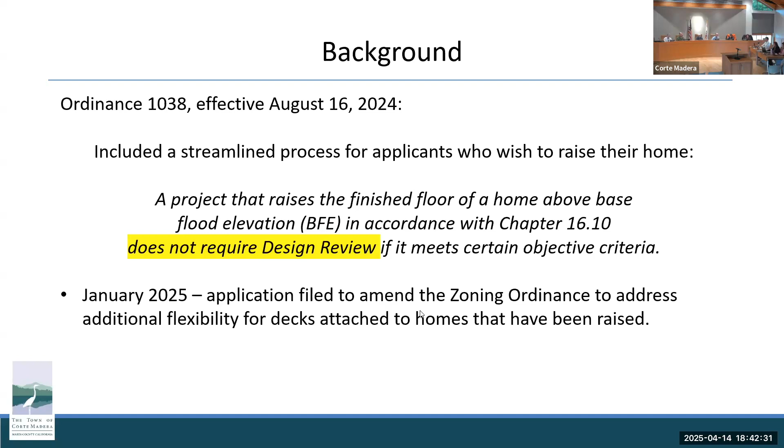In January, the owner of 299 Golden Hind Passage filed an application to amend our zoning ordinance, seeking additional flexibility related to decks that are attached to homes that have been elevated. They intend to raise the finished floor of their home by 2 feet 8 inches, and they'd like to include their deck area as part of the project and raise that to the same level as the finished floor of the home. Our zoning ordinance doesn't allow for that completely. There are 2 development standards inhibiting homeowners' ability to raise larger deck areas when they elevate their house: lot coverage and setback requirements.

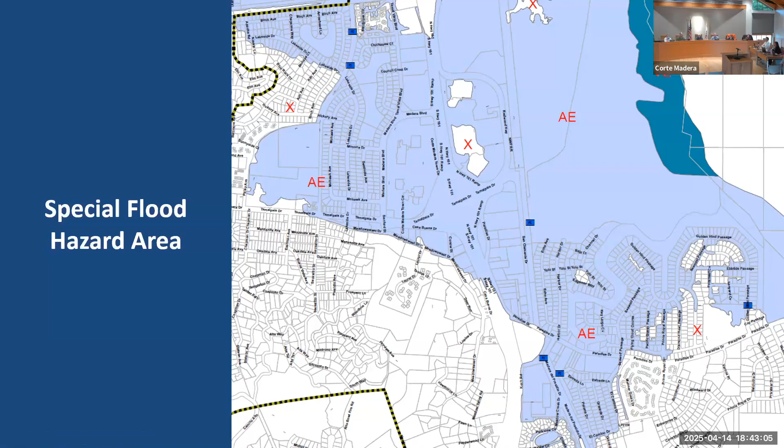Some of the homes that have been raised are in the Mariner Cove neighborhood, and a lot of them are on Golden Hind Passage. There's an attachment to the report I prepared in your packet—attachment 1—that is a list of homes that have been elevated since 2016, and it includes the amount that each home has been raised.

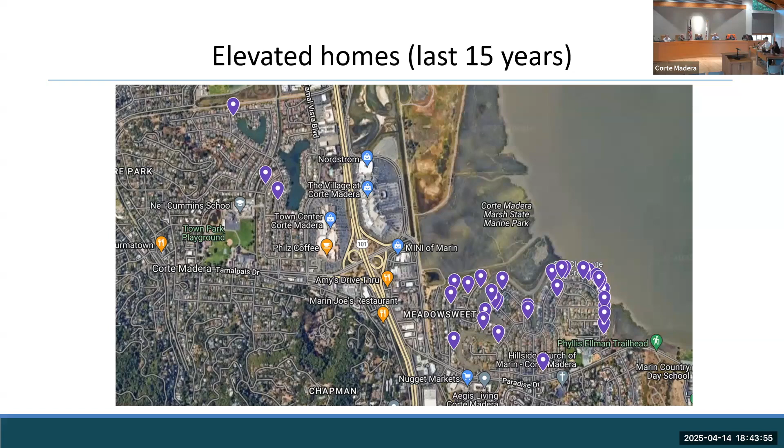As I said, one of the development standards that affects how much deck area, landings, and stairs a home can have when it's elevated is lot coverage. Lot coverage regulates how much of the lot can be covered by structures. The purpose of lot coverage is to control the concentration of structures on a lot and maintain open spaces.

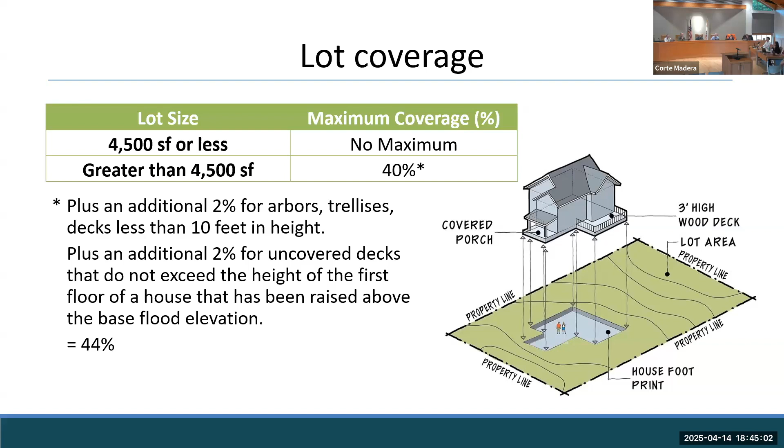In Corte Madera, the properties in the flood zone happen to be in our R1 medium density residential zoning district. The maximum allowed coverage in R1 depends on the size of your lot. There's no maximum for smaller lots that are 4,500 square feet—we don't have very many of those in the flood zone, if any at all. So most coverage requirements for parcels in the flood zone are going to be around 40%, and you can get up to 44% coverage. We add 2% for decks, patios, and trellises, and then an additional 2% when you elevate your home to account for raised landings needed to access the higher finished floor.

This slide is just showing a graphic of what I just talked about. A deck that is more than 3 feet in height counts as coverage towards that 40% or 44% maximum I talked about. A deck, however, that's 3 feet or less in height does not count as coverage.

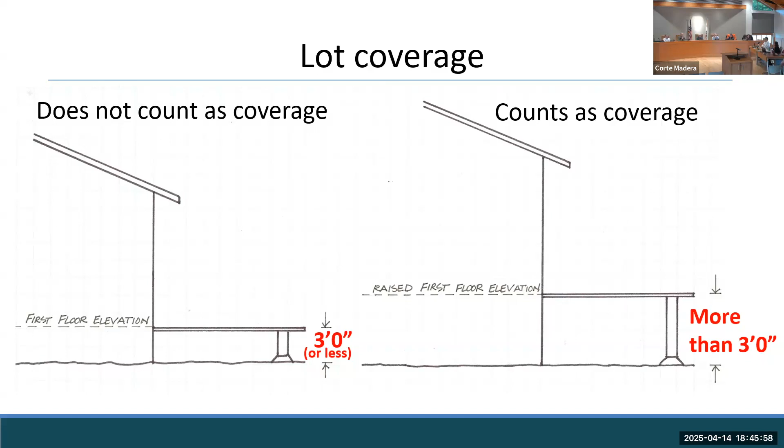Raising a home above base flood elevation oftentimes increases the height of a home by about 2 to 5 feet. That's what we're seeing today. And that's going to impact the stairs, landings, and decks attached to it, the height of those. Oftentimes those new decks and stairs to access the higher finished floor are more than 3 feet in height. So you have new lot coverage when somebody raises their home. And where we are seeing people elevate their homes, they're approaching maximum lot coverage and often exceeding it, needing that extra 2% that's offered.

Oftentimes you see this two-level deck design. Before I describe what's on this slide, in 2009 the town recognized that homes that are elevated are approaching maximum lot coverage and added that extra 2% I'm talking about. An extra 2% for a lot—most lots in the flood zone range from 6,000 to 8,000 square feet in area. So an extra 2% only computes to about 120 to 160 square feet, which is not very much if you take into account existing deck areas and the amount of stairs or size of landings needed just to access the higher finished floor.

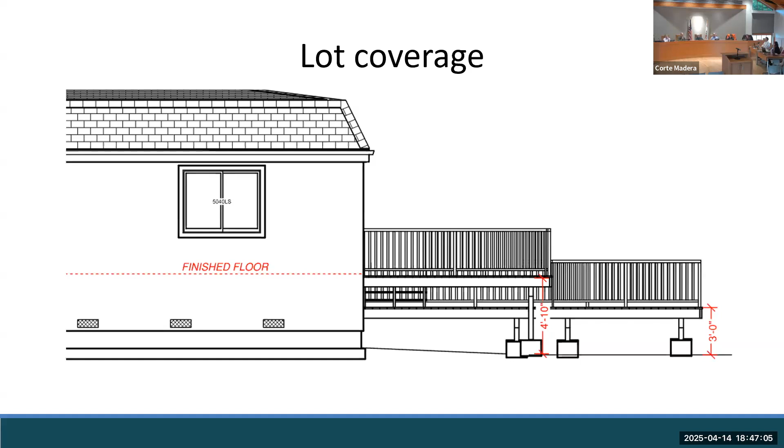As shown on this slide, if lot coverage isn't sufficient, you end up with this two-level deck design where you have a higher deck used to access the raised finished floor of the home, and then there's steps down to a lower deck that's 3 feet in height or less and doesn't count as coverage. That's what this slide is showing, that two-tier design.

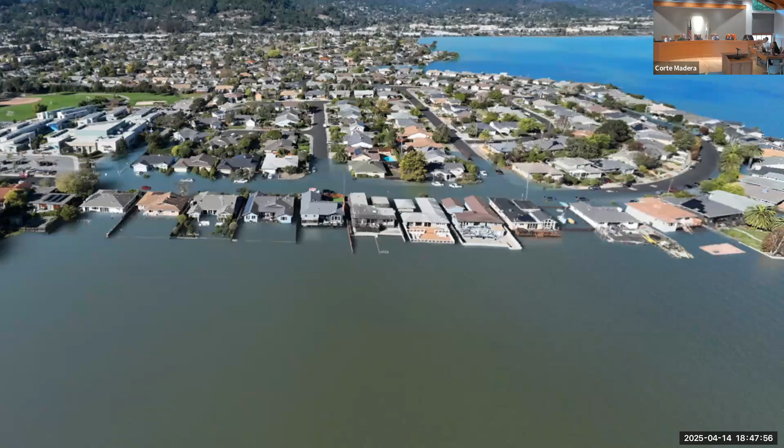It's just another picture of sunny day flooding on the water, and it clearly shows that raised decks and deck areas generally are important to these property owners.

A second development standard that can limit the amount of raised deck area attached to an elevated home is required setbacks. A setback is a required open area and is the minimum distance that a structure needs to be away from a property line. In Corte Madera, the required rear yard setback is 25 feet.

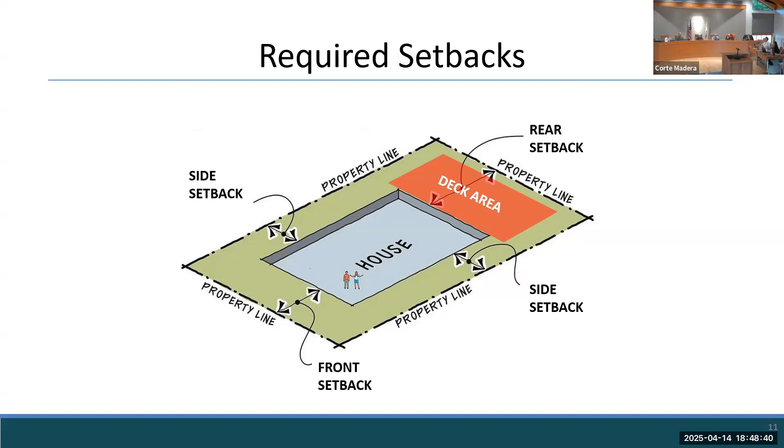Our zoning ordinance allows certain things in a required rear yard setback, and one of those things is decks. There's a red box on this slide showing that a deck that's 3 feet or less in height can be as close as 5 feet to the side and rear property lines. That's what this slide's also showing. On the left-hand side is a graphic representing the permitted location of a deck that's 3 feet or less in height, and that striped area shows where that deck can be located.

A raised deck, meaning a deck that's more than 3 feet in height, can only extend 6 feet into the required front or rear yard. In the rear yard, that means a deck attached—often to an elevated home—needs to have a 19-foot setback from the rear property line.

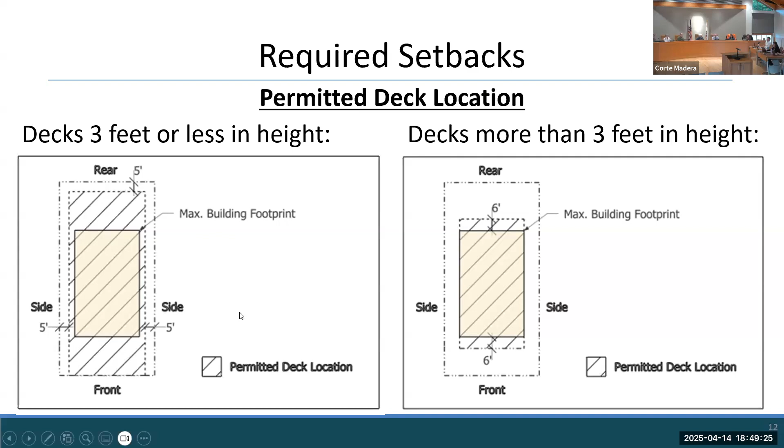Staff has been studying this zoning ordinance amendment application and considered a couple of different policy options that could be implemented to solve the issue at hand. One is that the town could consider an increase to total allowed lot coverage. I've stated before that you can get up to 44% if your house is elevated. The town could consider increasing that by another 2 to 4%. This regulation applies to any property in the R1 zone, in the flood zone, that elevates their home—can get up to 44%. So that's one way to address the issue at hand.

For the applicant, it would need to be combined with one of the other two options on the slide here, and that is to modify the way that we measure lot coverage. I talked a lot about how a deck that is 3 feet or less in height does not count towards coverage.

Additionally, a deck that is greater than 15 feet in height, for instance for a hillside home, only counts at half, or 50%. Since a deck attached to an elevated home is going to be between 3 and 5 feet in height, that's much lower than a 15-foot high deck.

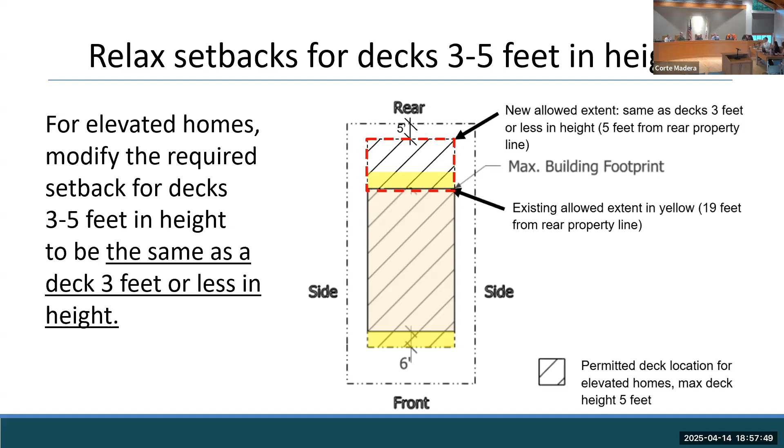And this is what we're considering as far as who could benefit from some of these regulations. For simplicity for the end user, we've identified all of these parcels on the odd numbers along Golden Hind Passage, but the grades of the lots on the lower numbers are much higher, so we don't anticipate that they would need to take advantage of this provision.

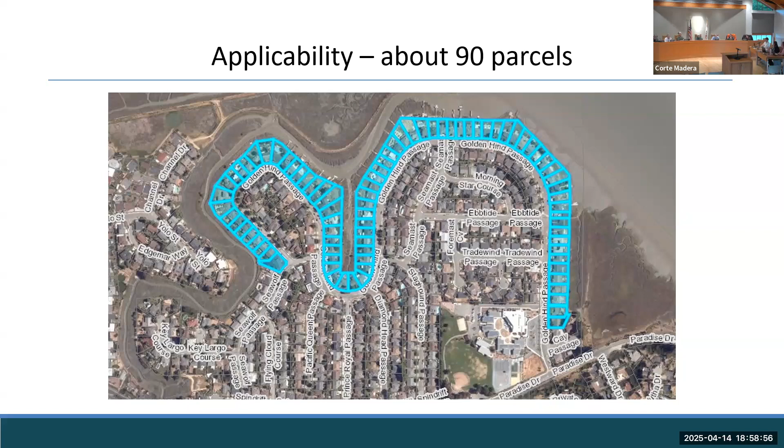As an example, 29 Golden Hind Passage is raised more than 2 feet above base flood elevation, but since the grade of their lot is higher than it is over by the Cove School, they only had to raise the house by 1 and three-quarter feet. So all of their decks are 2.5 feet in height, less than 3 feet, and don't count towards coverage and don't need any of these regulations. They're able to accomplish their project without these modifications. Additionally, since the grade of their lot is higher, they're not seeing the saltwater intrusion—they can create landscaped areas and patios and other options besides decks that work for them.

I think it's important to remind everyone who's listening that we do allow raised decks in the rear yard right now. We talked about some of those standards, the setbacks for them, and we allow them without a design review unless they get very tall, and without privacy screening. I also wanted to remind the room that what we're talking about is allowing the decks to be raised up. The applicant has an existing deck that they would lift up higher than 3 feet, and that's why we're here today.

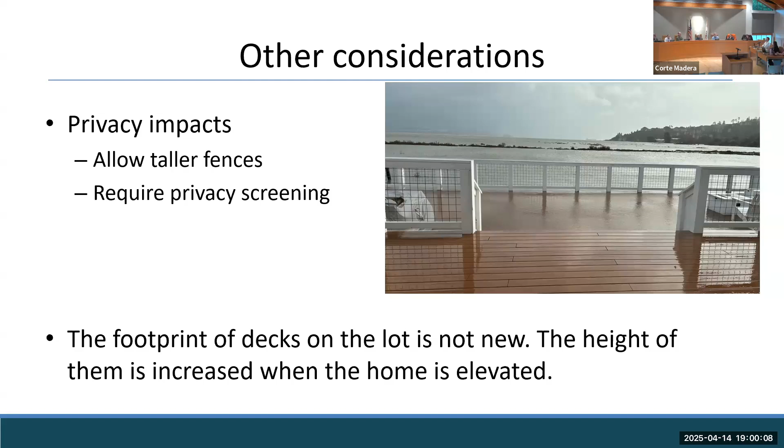Next steps for staff—we would take your feedback and any member of public's feedback and further refine some of these amendments and bring that to the planning commission. The planning commission, town council is the decision maker for any changes to our zoning ordinance. That's all that I have. If anybody has any questions, that's great.

Okay, go with Phil. Tracy, thank you very much.

The 40 to 44% figure that you were talking about in the beginning, is that the max that you're giving under variances applied for on an ad hoc basis? That's the max allowed under existing regulations.

So if one were to apply for a permit to elevate their house, we've created exemptions to design review for that. They'd provide us a lot coverage calculation, since most likely there'd be at least a minimal change in lot coverage. Most homes not raising have 40% coverage, and when you elevate, you get an extra 2%.

When we changed lot coverage in 2017, we added another 2% for covered patios and trellises, which were commonplace in the R1 zone—the covered rear patio you've probably seen—that's an extra 2%. We're looking to resolve the number of lot coverage variances we're processing.

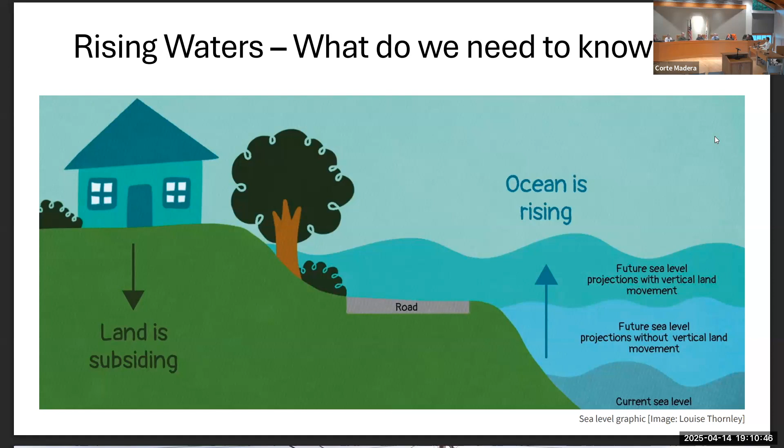The first subsidence study done at the behest of the town was the AN West 2007 report. In that, they were able to show elevations, including Ebb Tide and Golden Hind, at the time fill was placed for Mariner Cove's construction in 1958. They were able to get up to 2007 with surveyed elevations, and then they made predictions of future subsidence based on core samples taken throughout the neighborhood. They looked at the compressive strength of the bay muds and the depth of the bay muds, and were able to calculate what they saw as the future compression and future subsidence.

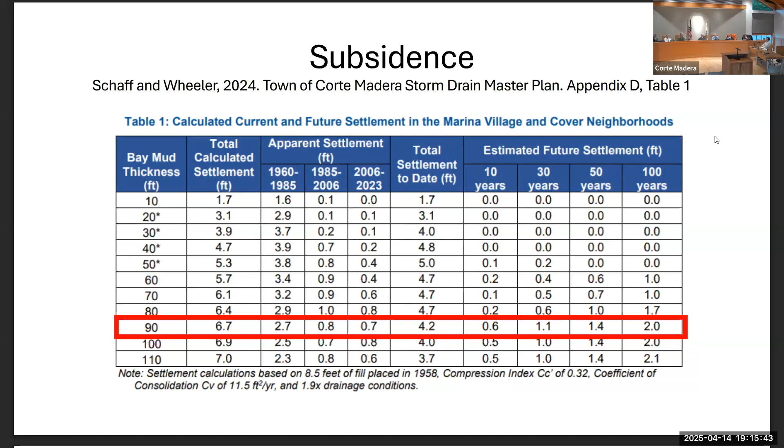So I used these to create the past subsidence shown in the graph, and also used this to show the future estimated subsidence. The next one.

This is the Science magazine article that corroborated the InSAR subsidence measurements. But to cut to the chase—in the middle, they're looking at a rate of 10 millimeters per year, or 0.4 inches per year, which is currently substantially more than sea level rise. So it's really important to take subsidence into account, especially along the coast of Mariner Cove, because subsidence is a larger impact today than sea level rise.

But it is very, very much the same as other sources we're seeing, and that's what I say in the second bullet—how it closely matches the estimates we've seen in the past.

This is taken directly from the sea level rise guidance for California, which is the town's official source for predictions. You can see on the left the year going from 2020 up to 2150, so the graph I'll show later goes up to 2150 as well. The description of these different estimates is different than the last guidance, so I'll do my best to explain what I think they were trying to do here.

I used a bound of future sea level rise that incorporated the two boxed titles, the intermediate low and the intermediate.

It doesn't say it explicitly, but what the text describes is that the midpoint between the intermediate low and the intermediate seems to be about the 50% probability, the P50 for sea level rise, or the median expected sea level rise. The low end is intermediate low, and the high end is intermediate.

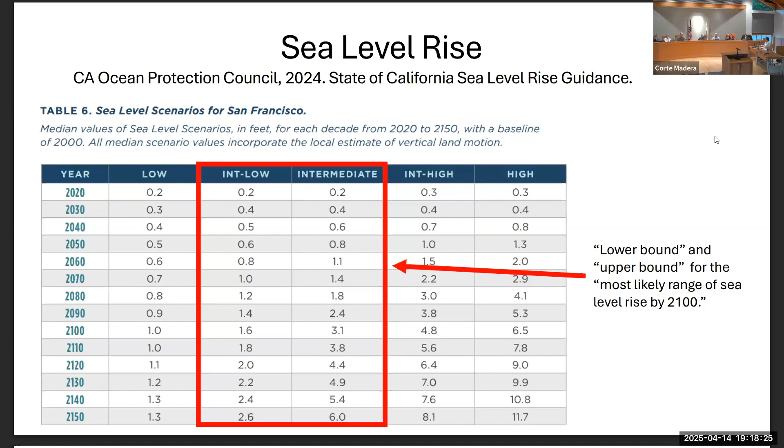That's just a picture of the Richmond tide gauge, built on bedrock in a very solid building and maintained by the government, and hopefully will continue to be maintained by the government.

One of the things you can see in the small graph at right is that there's two offset lines. The blue line is the predicted tide, or otherwise known as the astronomical tide, and what that means is that's what the tide would be if there were no other influence but the basic location of the moon and the sun. The red line there shows a higher measured tide, and that can be from a couple of reasons.

When storms are present, you can picture the old weather maps with the big red H for high pressure and a blue L for low pressure. Those actually exert pressure and deform the surface of the ocean. A high pressure area depresses the ocean, and a low pressure area allows the ocean to rise underneath it. So when you have low pressure coming in from the west, it's actually a mound of seawater that's traveling with that low pressure and into the bay, essentially. You can see those differences, and they're much larger when you have a big low pressure system come in.

Those differences can be as much as 2 feet higher than the predicted tide. You can also see that once those big storms pass, if it's very wet in California and there's a storm that soaks the whole state, the mouth of the bay is actually the mouth of a river system that drains the entire state, basically. It takes another day or two for all those rivers to empty their water into the bay, and that water essentially backs up in the bay, so the level of the bay is slightly higher than the level of the ocean. It's like a bathtub spilling over, essentially.

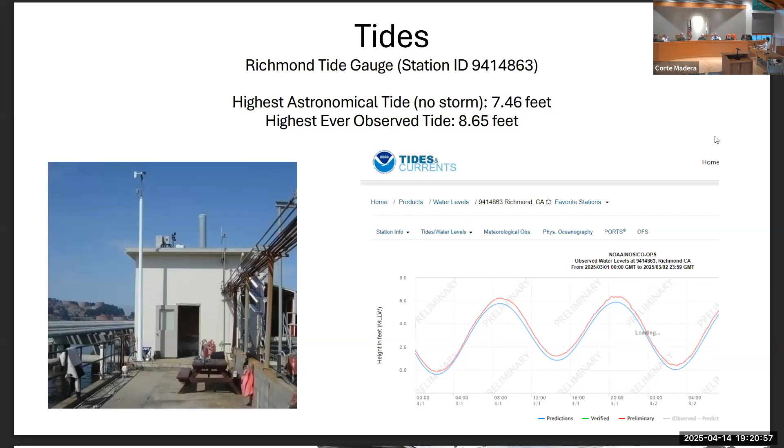The ground elevation is measured by a number of surveys, so we've got actual data to compare all those sea levels and subsidence too, and that includes the location right here at Ebb Tide and Golden Hind.

Next one. That was 7.2, the elevation of the surveyed location. That tide right there was probably just below 8, or around 8, yeah.

The ground elevation here is 7.2, and the maximum tide possible is 10, so that location could be 2.8 feet underwater in a big storm. Luckily, we've never seen that.

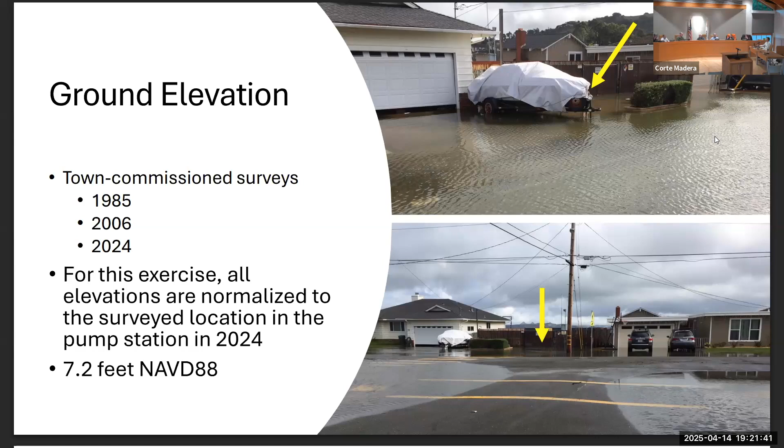So that was, I felt you need to get all that background to understand why this is just such a simple graph. But this Excel also has all the backup tables that I just talked about and the calculations I used, and that can be available too. It's pretty simple going left to right from past to future.

The green line is the elevation of the land at Ebb Tide and Golden Hind, and the blue line is the maximum tide, that 10-foot tide I described, up to present, and then bifurcating into those two ranges into the future. So I'll just point out a couple of things here.

First is that the leftmost part of those graphs is 1958 when the fill was placed, and Ebb Tide and Golden Hind, doing a calculation for what used to be there, it was about 11.7 feet. And the maximum possible tide was just under 10 because sea level hadn't risen that much. So the biggest tide possible, you're high and dry by a few feet all across Mariner Cove.

Since then, as you can see, the green line going up to 2024, there's been about 4 feet of subsidence there and very little, less than a foot of sea level rise. So subsidence is really the issue in Mariner Cove at present.

In 2024, that black line shows the range there. As I said, the maximum possible water depth at that location currently with a big tide and a storm would be 3 feet. Then going into the future, looking at the sea level rise based on guidance and the subsidence based on guidance, we see by 2074, 50 years from now, that location could be between 5.3 and 5.8 feet underwater during a big storm.

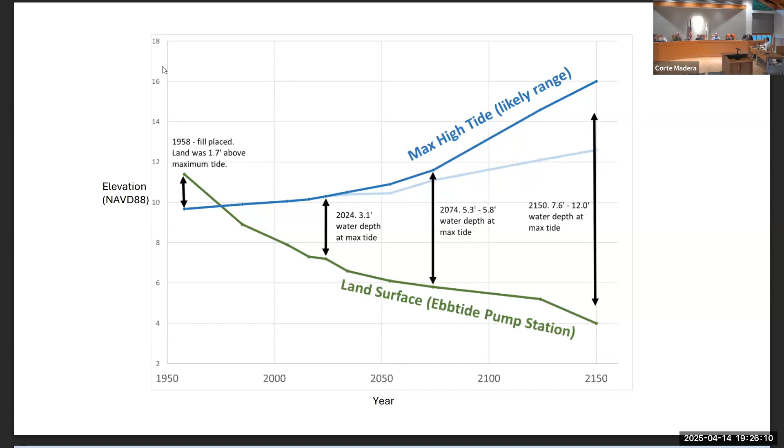First, thank you. This obviously took a lot of work, and everybody is more knowledgeable because of your work on that. So thank you for doing that. I'm reminded that we made great progress on that berm project that's going out for design, and that project, which many people in that neighborhood are thrilled to hear about, but the life cycle on that is like 5+ years into the future.

We're not even talking about Mariner Cove and how to get that property in that neighborhood controlled. So when we look into the future, what kind of problems we're dealing with, it certainly makes it very present how quickly we need to act to do something.

I do have a quick question. Are we supposed to be having this one or is it? So this is for Mariner Cove. I don't know if it includes the village over there. But what about Madera Gardens? Is that also having subsidence issues, or not as much because there's not the tide, or is it compacted greater? Has anybody considered if that area is subsiding as well?

I think the Schaff and Wheeler study focuses on Mariner Cove and Echo and those areas. But the InSAR radar work that was done over a larger swath of Corte Madera, I didn't see anything specific in a report, but that data does exist somewhere. We could find out who produced the science report and see if we could request it. But it really is, as I showed in that one chart using the 90-foot bay mud number, if you go down that chart, the deeper the mud, the more the subsidence. So I think it is much shallower bedrock there. It's really a function of how deep the bay mud is that causes the subsidence, which is the real problem now. And this subsidence is only specific to 90-foot bay mud, which is only at the edge of Mariner Cove.

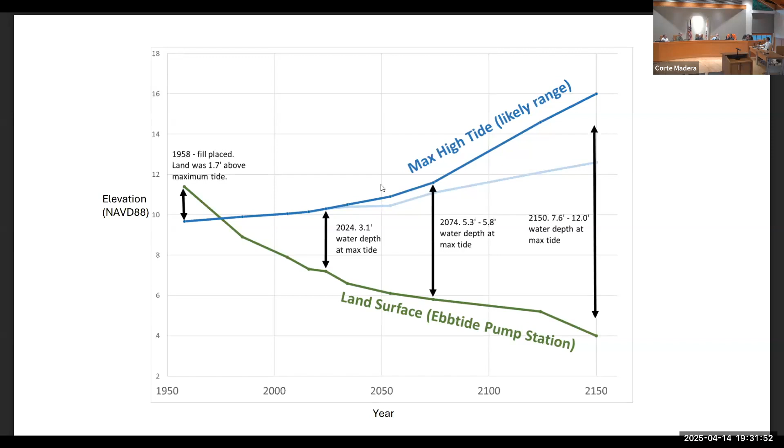Okay, so I'll just be going over basically the first round of projects that we are pulling from recommendations out of our storm drain master plan.

So starting this year, we're trying to get 4 projects going and potentially one more if we have time. But those are the short-term pump station repair project, the gravity storm drain replacement project, general storm drain maintenance which includes cleaning and CCTV, and then Shorebird Marsh pump station replacement. I'll go a little bit more in depth on all of these.

The last one is open channel maintenance, which is basically pulling material out of our open channels around town to improve drainage. But that one's a little more challenging—it's going to require environmental regulatory permits, so we don't know if we'll have time to start that this year.

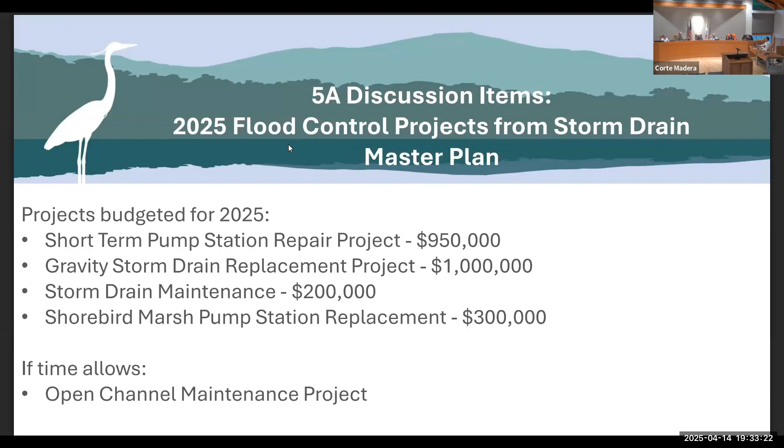So this high canal and low canal you're talking about? It wouldn't be high canal, I think it would be low canal, and then the channels behind like Nugget Market. There's a few others peppered around town that are kind of overdue for dredging out.

Okay, so first one was the short-term pump station repair. Basically this project is a recommendation from Schaaf and Wheeler to try and get all the urgent items for all of our flood control pump stations. You can see here a list of some of that work—a lot of it's just replacing cathodic protection, recoating components, replacing pump controllers that are like 30 plus years old and aren't working well anymore and are really difficult to get parts for.

Adding backup level sensors that basically is insurance for us, because we've had recent issues where we only have one sensor, it breaks, and then the pumps don't turn on. That can cause flooding events if our staff aren't aware of it. And then basically just any other structural or anything else that the engineers recommend replacing in the short term.

So we have started design on that project, and we're basically going to design everything and then, depending on how it works out, we're planning to break it into 2 pieces. We'll try and get the first half done this year, and then potentially the second half next year if we were able to get it done in time. That recommendation, the total cost of all the work was 1.9 million.

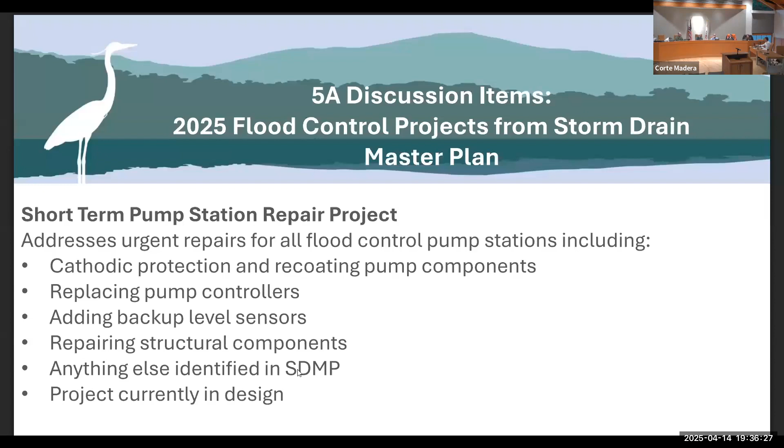Continue. Okay, so that's the first project. Second one, gravity storm drain replacement project. This is basically combining capacity related projects that were recommended as well as condition related storm drain projects, mostly on just gravity storm drains.

So we kind of went for the worst of the worst to start, and identified which ones around town made sense to group together. Those were located on Hart Street, Palm Ave, Sonora Way, Corte Madera Ave, Chapman, Stetson, Montecito, and Fifer.

So we have $1 million to spend, and we kind of picked more than we can afford to do, and we're going to just figure out which ones are going to be easier or harder, and then basically shape the projects based off the budget.

So those ones are all condition related. Most of them are corrugated metal pipe that's corroded, and generally the bottom half of the pipe's just gone at this point. So those are kind of a ticking time bomb, because if you let it go too long it can cause a sinkhole—eventually the whole road can drop if it's under a road or whatever it goes under.

And then the second part is the capacity storm drain projects. So we picked three of those to look into: Pixley, Key Largo Course, and Hart Street. I think I've got some pictures. Oh yeah, and then there was one other one we're taking a look at on Tamal Vista Boulevard.

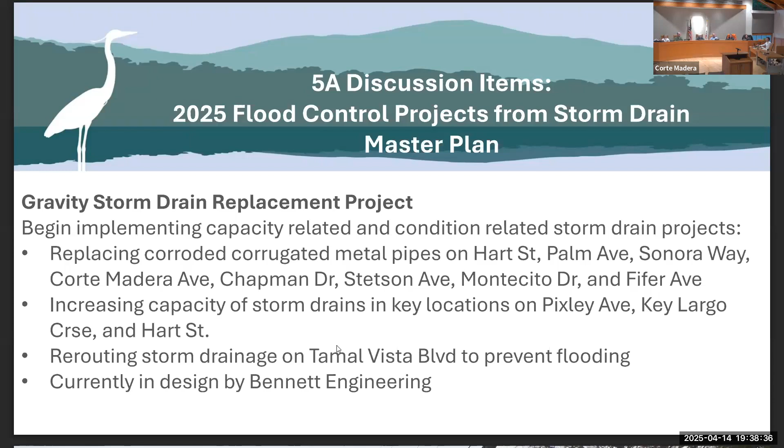Chris, the one on Key Largo, is that going to be a liner? Do you have an easement to dig that up and replace it? That's something we need to figure out. It's the pipe that goes in between the houses through an easement out to the bay. And they're recommending, or Schaaf and Wheeler recommended, to increase the capacity.

So we can't line that one, we'd have to just replace it. So that one has a big maybe, because it outfalls into an area kind of by the fire station. We'll have to see if it's going to be possible or if it's going to be a more difficult project.

So here is a picture of the Tamal Vista issue. Right now, I think we may have talked about this once before, but right now it drains towards the freeway and it outfalls into a ditch that's maintained by Caltrans, or they haven't been maintaining it, because of environmental issues. So the water basically just backs up every time it rains here.

So the goal would be hopefully to basically create a new outlet for it towards the lagoon or High Canal. That's what we're going to look at. And if it's possible and it doesn't cost too much, we'll try and do it this year. Otherwise, we'll look at it in future years.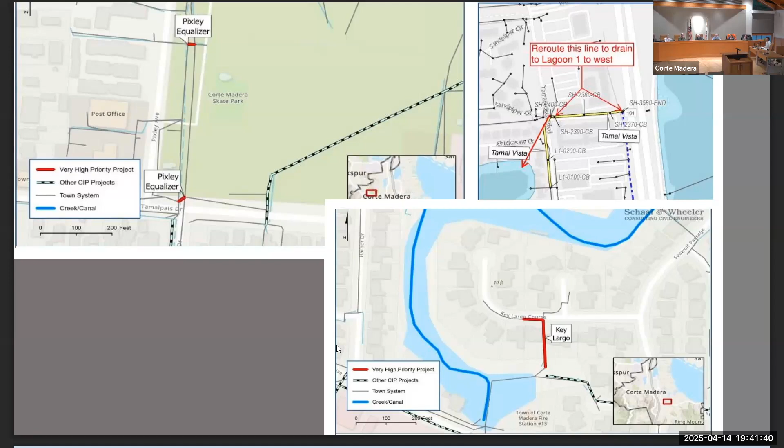So the storm drain maintenance, we've basically had a budget for this every year, but this year we've been more reactive, and this year we're trying to be more proactive. We're going to start picking storm drains to clean out, hopefully starting in May. I think we had budgeted $200,000 to spend. So we have a list from the master plan and a list that our maintenance staff have come up with.

Just based off looking around town, there's some pipes that are 50 to 100% full of sediment and basically aren't functioning anymore. And you don't see the issues unless there's a large storm. So the goal is to kind of deal with it ahead of time.

The one issue we've been having is getting rid of the materials that you pull out is extremely difficult these days. They won't let us just take it to the dump. And even people who have properties that allow soil, you have to first drain the water out of it, test it for all sorts of chemicals and different things before you can take it. And unfortunately in Corte Madera, we have very little space to store a bunch of soil that we're pulling out of these pipes.

So we have a plan. We're going to use our staging area on Paradise, and basically get bins in a big tank to store the soil, let it drain, dry out, and then we have to test it and then get rid of it. But all that adds a bunch of costs and reduces the number of pipes we can clean each year. So it's unfortunate, but that's just kind of where we are right now.

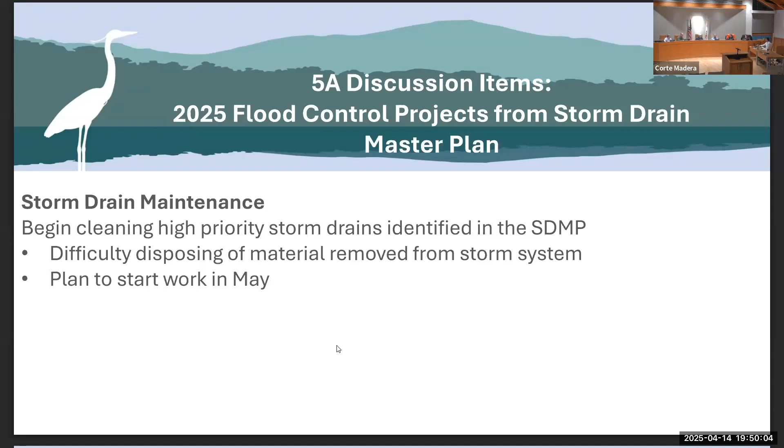All right, and then the last project I'll be talking about is the Shorebird Marsh Pump Station replacement. This is going to be a multi-year project to replace Shorebird Marsh, which is, I believe, our oldest pump station and in dire need of improvement. The total estimated cost was $8 million. And of course, this is in a marsh, and the outfall pipes go through the levee, so there's going to be a lot of environmental aspects that go along with this.

So we're currently requesting proposals from some of our on-call engineering firms, and hopefully we'll get this started soon because it'll take several years. The pump station has a lot of issues with corrosion and other things, and it's not connected to the power grid, so they're all diesel pumps, which definitely could be improved on.

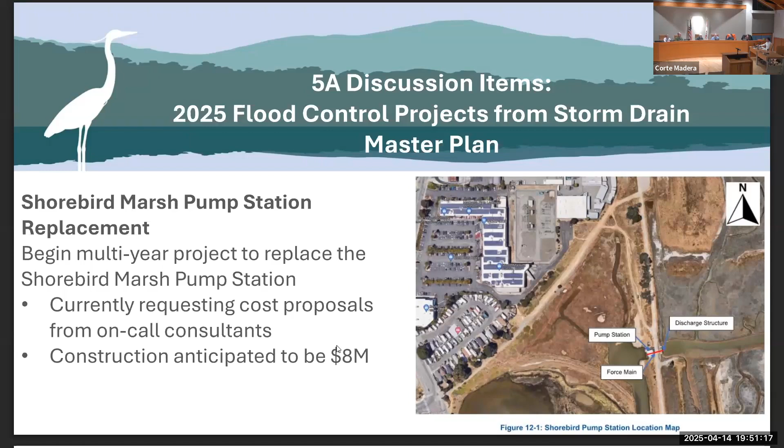The question I would have, if we're going to upgrade that -- Larkspur has some of their stormwater flowing into that area, and they have a smaller pump station right next to it at a very low level. If we're going to take this on, could we get some money from Larkspur to help with this project and eliminate their pump station? I mean, we can definitely look into that.

I wasn't aware a lot of their storm drainage was going into here. I believe a lot of the area on the east side of the freeway, on Redwood Highway, all drains into Blackhead Lagoon. So a large portion of the drainage going in there is either Larkspur, the county, or Caltrans.

Well, I always thought the small pump station just north of Shorebird, right next to it, was Larkspur, and that was supposed to pump out water from the end of Industrial Way and the mobile home parks and such. I believe you're correct, Bob. There is a second pump station, and I believe it's Larkspur. And I think you're right, it's Larkspur.

Yeah, I guess the only question is, does it pump into Shorebird Marsh, or does it go over the levee and then wouldn't be attributing to Shorebird Marsh? In that case, they probably wouldn't contribute. But we'll definitely look into it.

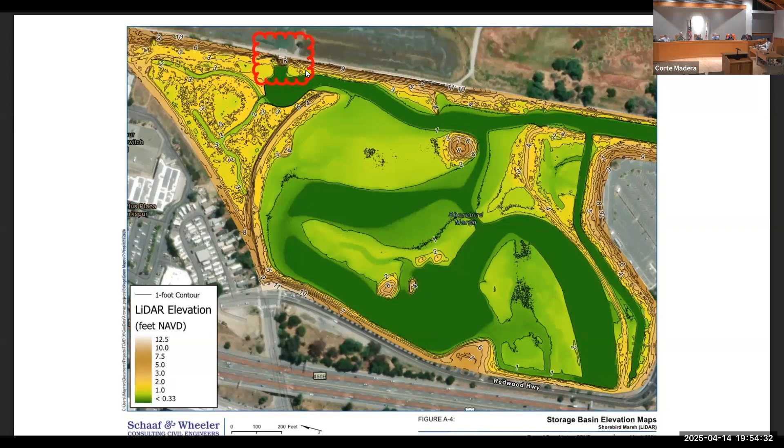Continue. Okay, let's see. Looks like nobody online. So on to item 5B, regional sea level rise coordination. This was a future agenda item from last time. The two organizations the town has been coordinating with are Baywave and Baycan. Baywave is run by Marin County and is more localized. Baycan stands for Bay Area Climate Adaptation Network, so it's larger throughout the Bay Area. Both organizations work to share information about individual projects for adaptation and sea level rise risk.

And then, I think Vice Chair Blomgren already mentioned this, but the Storm Drain Master Plan in the town uses the 2024 sea level rise guidance by the Ocean Protection Council for our different planning documents and projects. Baywave has separate sea level rise guidance.

So yeah, I'm happy to touch on this. One of the earlier studies was this vulnerability study from 2017, prepared by the county. Several agencies have since also taken on their own adaptation efforts, although ours is probably the farthest along out of the other jurisdictions. Currently, many are trying to get to where we are, where we have an accepted adaptation planning document.

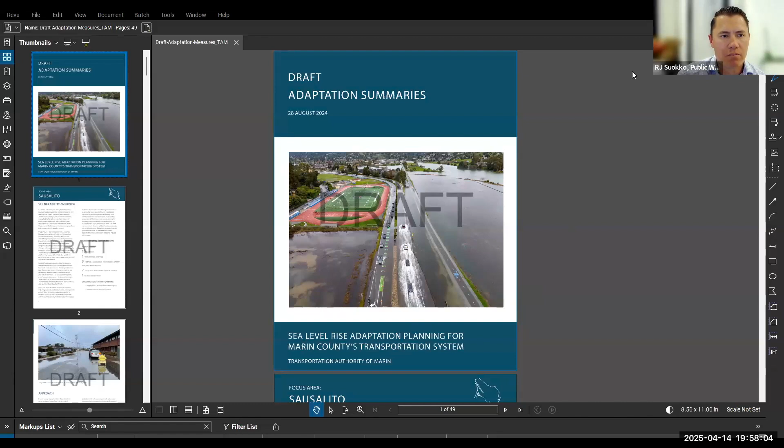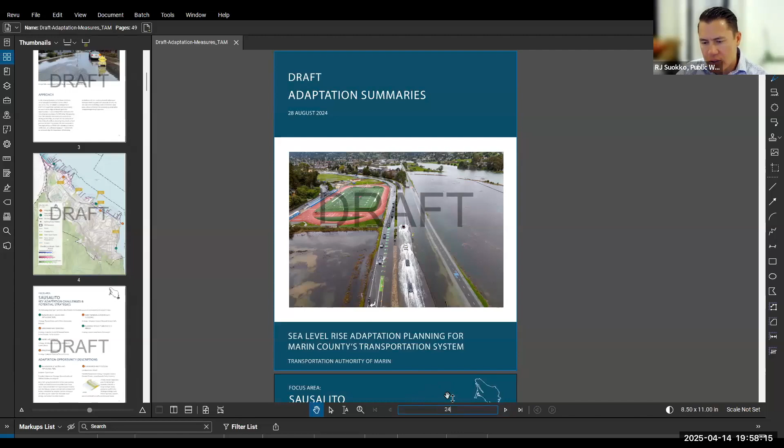This is a really good time to look at this document because it's still in its draft phase. We're actually meeting as a technical advisory group tomorrow for our final session, and then that'll lead into this potentially getting approved by the Transportation Authority Marin Board. So this is the perfect time to read the document, make comments, make suggestions, ask questions - all those good things. There is a section dedicated to Corte Madera and Larkspur.

And you can see a lot of what they've incorporated are things from our climate adaptation assessment. However, they've also gone and looked at Corte Madera Creek and upstream of that.

One other thing that's happening is between the town, Corte Madera, Larkspur, and County Marin - we've applied for a sea level rise planning grant. I believe it's using RM3 funds to study the smart corridor from basically San Clemente Park all the way up to the Greenbrae Boardwalk. So that's pending at the moment, but those are really the main efforts happening in the county that we're all coordinating on, and happy to answer any questions.

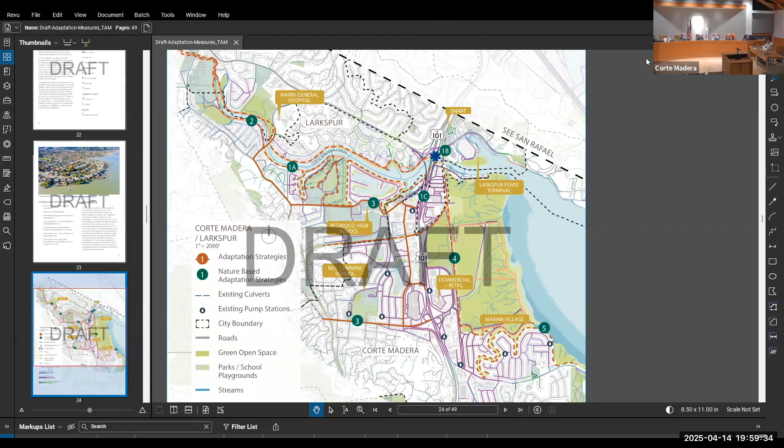RJ, I recall there was probably a 1995 study that looked to try to extend that north-south right-of-way levee to the overpass and up Corte Madera Creek. It got shut down because a couple of property owners on the west side of 101 objected to the seawall that was planned to be put in there. But is that a variation of what TAM is looking at?

You know, it's been brought up, right? There's people who say, hey, why don't you just berm off right at the Golden Gate Bridge? Or other people who say, why don't you just berm off between San Quentin and Corte Madera? And the current reality is that the regulatory agencies would not allow that. So until such time that the environmental regulations and laws change, it's otherwise just an idea that it's hard to really put money into when you know it clearly does not follow the regulations. So I don't know if that answers your question,

but it certainly comes up every now and then. And something I would ask RJ is, I think what Bob was suggesting is Corte Madera Creek is in the concrete structure past College of Marin, but as it opens up, there's currently bike paths on both sides that are levees, but if those were extended and raised, they could be connected to Corte Madera potential levees as well.

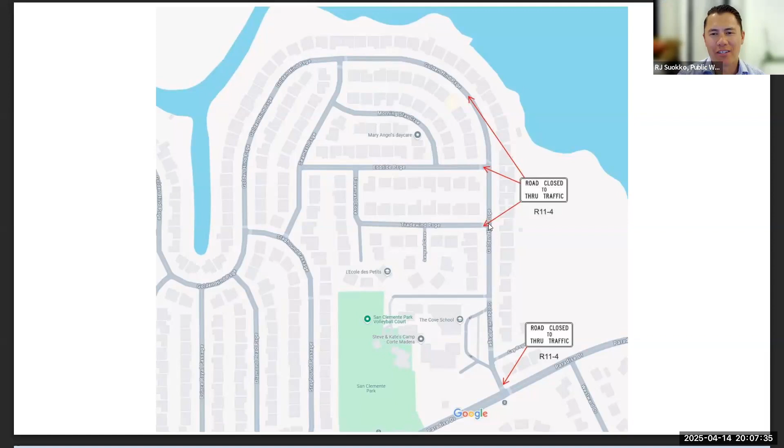We just have to find a place to store them that could be accessed by the public, probably near the sanitary pump station. We usually store those inside the pump station, but you need a key to get in. If we come up with a specific plan, we'd train you on how to put the sign up properly in that location. At that point, I think we could probably be fine with it.

Yeah, I think there's a number of us who would be willing to be deputized to do that. And I think it could be stored in the immediate area, in other words, I'm sure there would be a neighbor that would volunteer to have that beside the house in an area that another neighbor could get to that was deputized.

We're open to suggestions, and we can always plan a time to meet, figure out a place to put the signs, show people what should be done, where the signs go and everything, when they should go out, and then they'll be available. So I think we are open to that.

I will say we are going to install another check valve near Golden Hind, at Golden Hind and Prince Royal, but I think that should help the tidal waters from coming out of the storm drains in that area. Although if there's a storm, then it'll still happen.

Really, the bigger problem seems to be Seawolf and Golden Hind Passage. I mean, I think the check valve is just not working sometimes. They always have issues if materials get stuck in them.

I think some flexibility on locating the signs, honestly, because back in December it was flooding into our driveway, which is about where the cove entry is. So you have the road closed, there's 3 signs up there. We'd need one even closer, to that end, because it was up closer into the school. So just enough signs that we're kind of geared to any number of occasions, right?

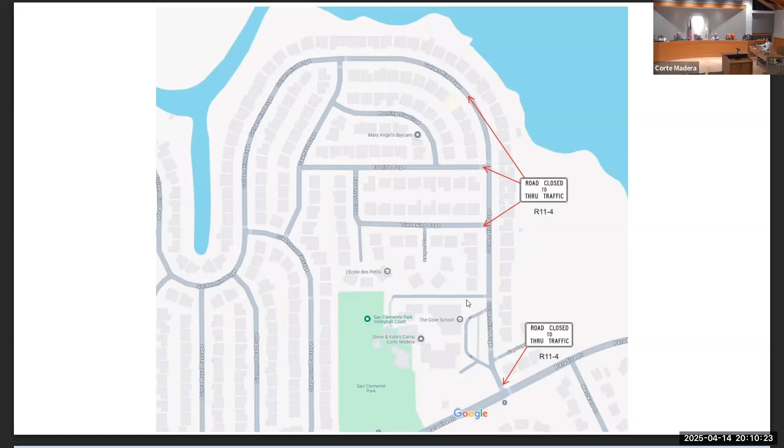Okay, project updates. So just 3 quick ones. The 2024 Madera Gardens Storm and Sewer Project is nearing completion. Should be done this week, actually. They're just basically finalizing some of the contract work, and then it's just punch list stuff. So hopefully by Friday or potentially into next week, that should be done.

Marina Village flood berm grant - just wanted to give an update that we're still waiting. I recently heard that FEMA has basically ended the BRIC grant program. This one was through the FMA, but there's a very high possibility they may cancel all grants. Unfortunately, they've selected us, but it's not official yet. They keep sending RFIs and we answer their questions. We're just waiting to hear back. So at this point it's very uncertain, but hopefully we get selected officially and get the grant.

Not the best news, but we're just waiting and seeing right now. Spring gate maintenance was last week, so our crews were frantically running around cleaning out all the pump station wet wells and maintaining all the gates while water was low. I think they were able to accomplish everything they needed to do, so the water is back to normal in all our lagoons. Next time we'll have a report from them on what they found and any new issues we need to address. So that's it for project updates.